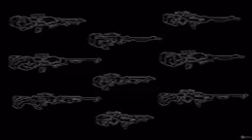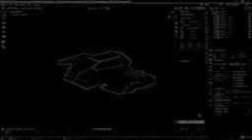In this video, I will show you the creation rules and the cleaning stuff that sometimes you have to do during the process of creation. So the first thing that we have to be aware of is when you have a mesh like a cube, for example. I will make a cube and focus on it with the numpad here.

When you make a cut, with Ctrl+Shift+X, when you make a cut like that and make a line, and one of the angles is less than 30 degrees, like for example the second one here, and even maybe the first one, but at least the second one will be less than 30 degrees, you can see that it's a wide angle there.

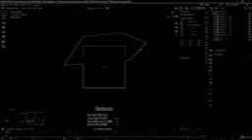So when I make a cut there and just make a remove, or even without remove it will be good, I will remove this part. Okay, again I do it here, there. Okay, good. Yeah, there it is, that's why it didn't work.

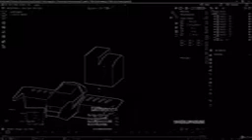It's because we had the cursor depth activated. So what I will do is just Ctrl+Z here, disable this with D, and come back there.

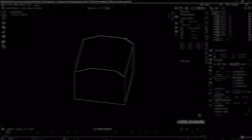Okay, and now we can see that if we go out with escape and make the bevel object here, this angle is sharpened, as you can see, but this one is not sharpened because it's less than 30 degrees. Yeah, it's just this that you have to be aware of.

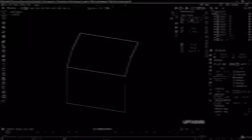So to resolve this problem, when you have this, you enter into edit mode and you will see the sharpened edges that are in blue and the rest that is in black there. So you just have to go there and make a sharpen. In case you want to clear some edges, you can go there and clear the edges, and there will not be sharpened as well. As you can see here, we have some bevel and not on these ones.

Okay, so important to understand that sometimes it will not add some bevel into your edges by default. You just have to add it manually after. Okay, so this is the first, let's say, rule to respect. Not really a rule, but a fact to be aware of.

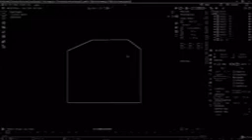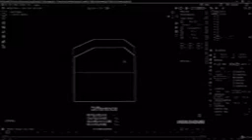Something that you have to take care of too is when you cut some edges like that, maybe I will select everything there and hide it like this. We are not disturbed with that. When you cut some other shapes, like let's say I would like to make a line here, okay, and in that case no problem. And let's say I will start to cut from here.

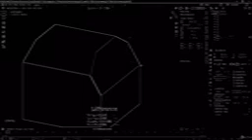I will make, on purpose, a cut that will go very near this vertex that is here. So I make this cut going very near here, and maybe that will go out very near the second one there. Okay, so this is not really something that will cause problems always, but in case it's really too close, it will cause problems.

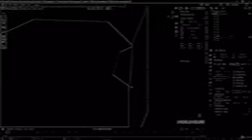Because after, when the bevel is too big, bigger than the distance between the two vertices, like for example if I increase my bevel there, you can see that here we have some artifacts that will start to come. So you have two ways of removing these artifacts. The first way is to decrease the bevel, and it will work well. Okay, so no problem with that.

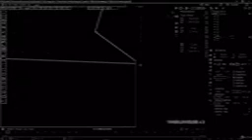But in case you still want to keep your bevel in this kind of amount, and you want to get rid of that, you go into edit mode. And you have two solutions basically. You select the vertex and make a GG to slide and have enough space between the two vertices here, and you will have something decent here.

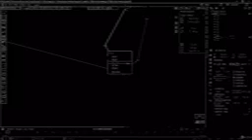But in case you don't want that, but you want a sharp angle there, you just select this one and make Alt M at last. Okay, so as it's something we will do a lot, this Alt M at last or Alt M at center, depending on what you want to do. At last will put the first vertex that you selected into the second one, and at middle it goes to the middle, as it says.

So as it's something we will use often, usually what I do is use the Q shortcut here, the quick favorites, by distance at center, and here I told Alt M at last that I would like to add into my quick favorites. So what I do is make a right click here and add to quick favorites, and now with Q it will come naturally, and you can add really what you will use a lot.

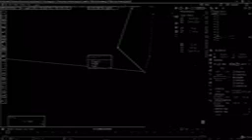For example, what is good with this method is that it's not only for edit mode, but for object mode too. We will do some shortcuts as well, quick shortcuts as well.

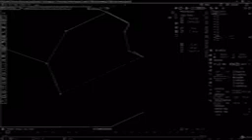Okay, so what you have to be aware of too, in case you have some problems like that. This one, for example, here is useless. We can see it because it's a straight line. So you can just get rid of it by remove and dissolve the vertex, and it will keep the geometry. So like that, no problem with this.

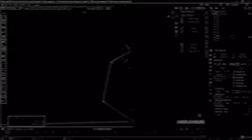So this was the first little thing to be aware of. Let's say you have the same kind of problems because the bevel is too big and you have this kind of artifacts there. You just select this one to that one and make Alt M at last, and it will resolve most of the problems if the amount is not too big. Here it was so big that this triangle was too little. But more or less it's like that we will have to work.

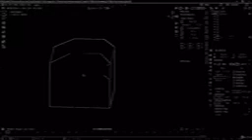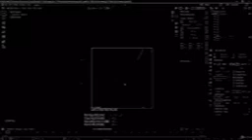One thing you have to be aware of too, it's when you do some cuts into circular shapes, like for example here. It's really something I don't recommend to make. Let's go there and make a Ctrl+Shift+X with the rectangle here, and I will just draw a cut like that. And with the rebevel I will just keep that like this. We can see that for this one here we have this that can be a little less big because we don't have a lot of space there.

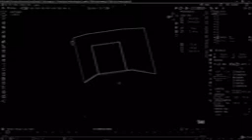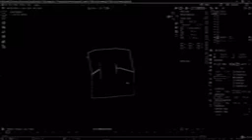What I would like to do first, when you want to make a manual bevel into an object that has the bevel modifier, like here, I would like to make a Ctrl+B to add a nice shape like that. So let's say I would like to add this kind of shape here. But you can see that Blender keeps this one as sharp and this one as sharp. So when you do a bevel like that, be careful that you just remove and clear sharp edges, and that will make a nice smooth surface here.

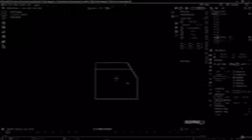Okay, we did make this kind of shape, but something I really don't recommend to do usually is to draw a shape, with Ctrl+3 I will be good there, a line like that directly in the middle of this geometry. This one can cause you some troubles. You can see that already we have some troubles there, because we have too much beveling into the object. But even if I decrease a lot the bevel, you can see that here I still have the artifacts.

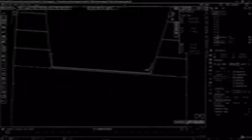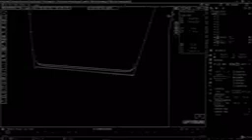So how to remove those artifacts? I will go manually, and as you can see here, this geometry is really too close to each other, and that's why it caused the problem here. So what I have to do, I will use K to draw and cut a shape over there, and I will make the same into this place. Now that I have this geometry available, I will go into vertex selection and make Alt M at last, or use Q to have the at last very quick like that, and it will remove the problem more or less. And it was an easy one, this one, let's say.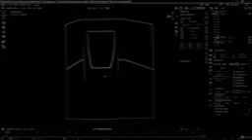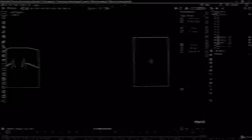When you have to draw a kind of circular shape into another curved shape or even circular shape, it can be a big mess. Big mess. Let's say we add another cube there, and we make a big bevel there, something like that. And we would like to draw another cut, but this cut will be a circular shape this time. So I will go into the good view with Control Numpad 3, and I will bevel my object first, then go with Control Shift X, and this time I would like to draw a circle over there. So something like this, and with a rebevel.

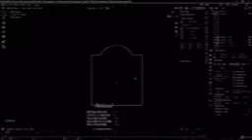Usually this is something I don't recommend to do, but in case you really want to make it, you will have little artifacts around your geometry, a little everywhere. So it's something a little more complicated to get rid of. Here in this model, for example, in terms of vertices, you can see that there's two vertices that will cause problems. So maybe we'll do at last here, and this one maybe, okay, it's possible to keep it. Here maybe we have two vertices very close to each other, and the same, with Q at last.

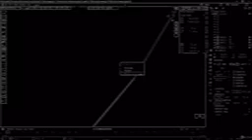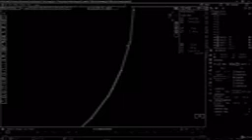So basically you will have to do that and come back to your model, and it can be a little time consuming for this kind of task, but it's the only way to get rid of all the problems. You can see that now this part is clean. Same with this object, you can see that this artifact comes from these two vertices, and just with Q at last, we will have something cleaner.

But more or less I don't recommend doing this kind of cut. It's a little tricky after, and time consuming. I don't say it's impossible, it's just time consuming.

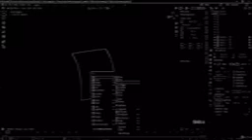And it will be even worse if you add, for example, a sphere here with GX, and I will make bevel object to have something smooth. With Control Shift X again, I will draw another shape, it will be another circle, and with the Alt key I will move it a little. This one will probably be a big mess.

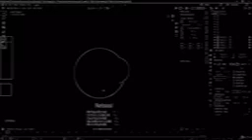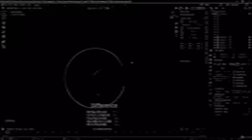Okay, so I did the cut. You can see a lot of artifacts around there, and if you want really something clean after, it's a little complicated, because here you have to respect the shape of the ball that you had initially. Like for example, here there's two vertices, three vertices that we will have to manage. Will it be on that one? Will it be on that one? So yeah, it's a little more tricky and requires more time.

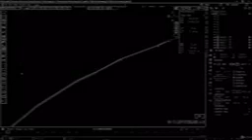Like for example, here I can merge at last here, and it will remove the problem, but we still have these two, but we want to keep the shape over there. So it can be really more complicated to use that stuff on curved shapes, and I don't really recommend it, because it makes a mess in your model after.

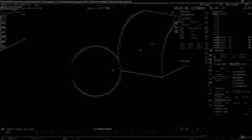Okay, so that's it for the creation rules. Here, what we did see with the other little object that we made before, I will make Alt H to unhide the model that we made before.

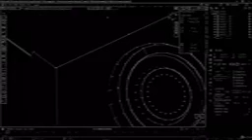We did see that here we had a little artifact, and this kind of artifact comes from a bad geometry or a bad implementation. So we'll have a look here, over there, this vertex. Maybe we have two vertices, and that's why it caused the problem. And yeah, usually it's this. So you can see here, yeah, we have a double.

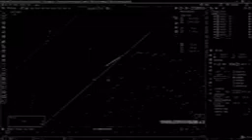So with B, I will just select, there's two vertices, and with Q, I will merge at last, and it will resolve the problem easily. Okay, so that's it for this kind of little problems that you can have during the modeling process. Usually it's just cleaning some vertices.

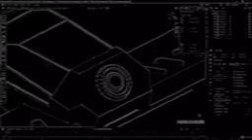Sometimes it can be just the shape of a face, like this one, that can be really too complicated, and Blender cannot handle it to make it properly. So sometimes you just have to make a K to make two more simple shapes. Like for example, you make a K here, and like this you will have just two faces, and it can resolve the problem as well.

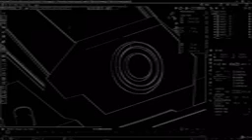But usually, more or less, if you respect the rules that I told you - don't cut too much in curved surfaces, make your bevel at the end of the creation process. Like for example here, if I would like to add some beveling around there, it can be possible now, to make it a little more interesting.

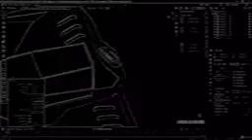That's good. Same around here, Control B, just to have something more interesting, depending on how much you want your model to be low poly or not. If you want something low poly, don't add too much bevel, because it adds a lot of new vertices and new faces.

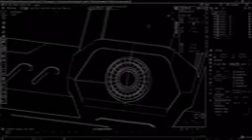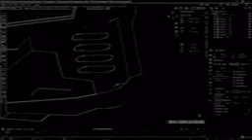And now you have already a shape a little more interesting. We could make this the same around this one, Control B, just to have this kind of shape. And clean after well your edges if needed, so I will clear these ones, and maybe these ones here sharpen.

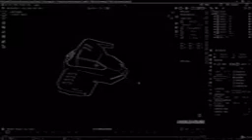And we'll have a nice curve that we will put on the other side as well. Just play with this to add some interesting shapes in the end, but don't add too much. Like for example, on that one I could add here, and it will give a more natural look in the end of your model.

You don't have to add everywhere, but just in really sharp angles where you see that it can make an improvement into your model as well. Okay, so that's it for this introduction of the modeling tools that we will use during the modeling process.